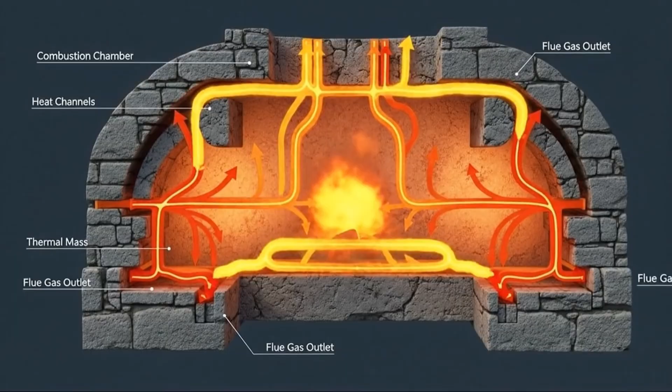Medieval peasants built something different, something modern heating companies don't want you to know exists. They built stone batteries, massive thermal mass heaters that absorbed heat slowly, held it for 24 hours, released it gradually. One fire in the morning heated the home until the next morning. They burned twigs and branches, waste wood, scraps.

We burn natural gas piped from hundreds of miles away. We burn it continuously. We spend thousands yearly. They spent nothing and stayed warmer. The technology is called a masonry heater, or a Russian fireplace, or a Finnish contraflow heater. Medieval peasants called it survival. Modern building codes call it obsolete.

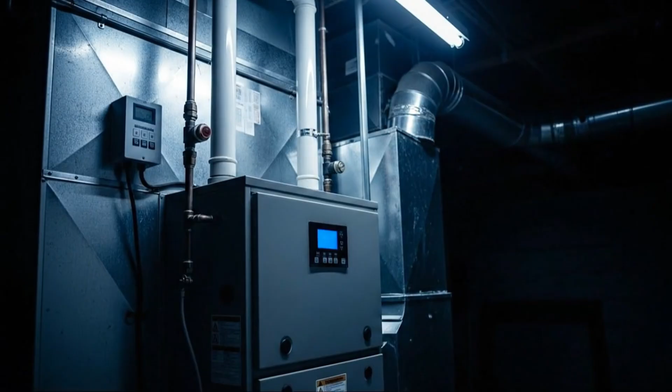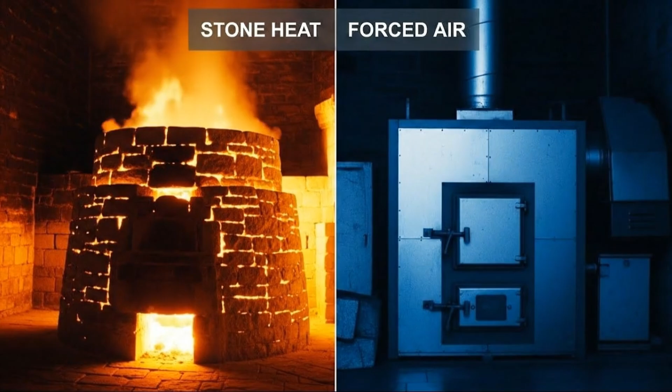But here's what modern codes won't tell you. Your $8,000 high-efficiency furnace dies the moment it stops burning fuel. A medieval masonry heater stays hot for a full day after the fire goes out. One uses constant energy and fails constantly. The other uses minimal fuel and never fails.

We traded durability for speed, efficiency for dependency. And now we freeze in homes that cost $300,000 while medieval peasants stayed warm in stone huts that cost nothing but labor. Section 2. The villain.

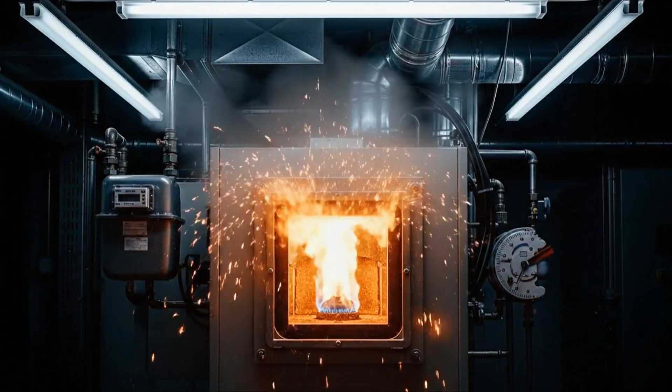Modern forced air heating. Modern heating is a scam. Not because furnaces don't work. They do. The scam is that they have to keep working. Forever. Continuously. Burning fuel every single day. Your furnace heats air. Air has almost no thermal mass.

The moment heated air touches a cold wall, it loses temperature instantly. The air cools. Your furnace kicks on again. The cycle repeats. You're heating the same air over and over, losing the same heat over and over. Medieval peasants understood something fundamental about physics. Air can't hold heat. Mass can.

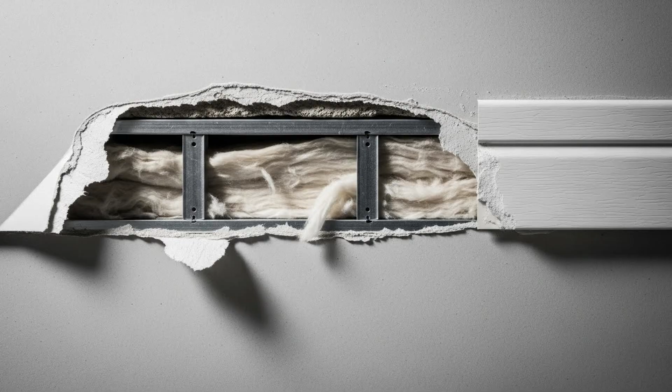Stone, brick, clay, earth. These materials absorb heat slowly, store it densely, release it gradually. A pound of stone can hold 50 times more heat than a pound of air. Your modern home is built from materials chosen for one reason: speed of construction. Drywall, studs, fiberglass insulation, vinyl siding. These materials are light, cheap, fast to install.

They also can't hold heat. Your walls are hollow, your insulation is air pockets, your entire structure is designed to be lightweight. When heat enters these materials, it passes through quickly, doesn't stay, doesn't accumulate. Medieval walls were solid stone, 2 feet thick, pure thermal mass. Heat that entered those walls stayed for hours, sometimes days. The wall itself became a heater.

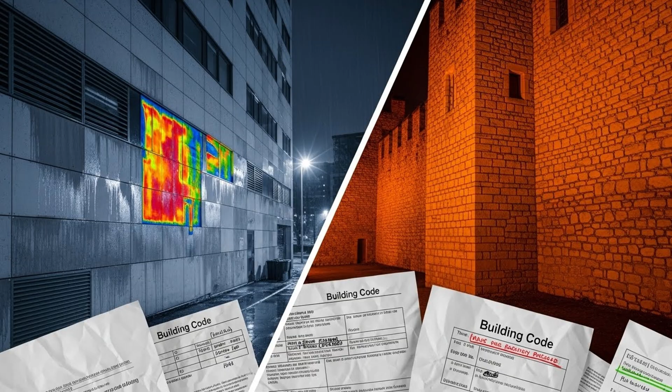Modern insulation tries to prevent heat loss. It fails because insulation is passive. Medieval thermal mass actively held heat, stored it, released it when needed. We replaced a heat battery with a heat barrier. The barrier leaks. The battery didn't.

Here's the cruel irony. Modern building codes require minimum insulation values. R values. Thermal resistance. Those codes were written by insulation manufacturers, lobbied into law. The codes specifically make massive thermal mass construction difficult to permit. Why? Because thermal mass works too well.

A population living in stone homes that heat with one morning fire doesn't buy natural gas, doesn't pay monthly utility bills. The entire heating industry depends on your home bleeding heat constantly. They built that dependency into building codes. Medieval peasants didn't have codes. They had physics. And physics says mass beats air every time. Section 3. The Forgotten Tech.

The Masonry Heater Mechanism. Walk into a medieval hall on a winter morning. The fire burned out hours ago. Ashes are cold. Touch the stone stove in the center of the room. You'll pull your hand back instantly. The stone is scorching hot. Hot enough to burn. Hours after the fire died, the stone still holds enough heat to warm the entire room.

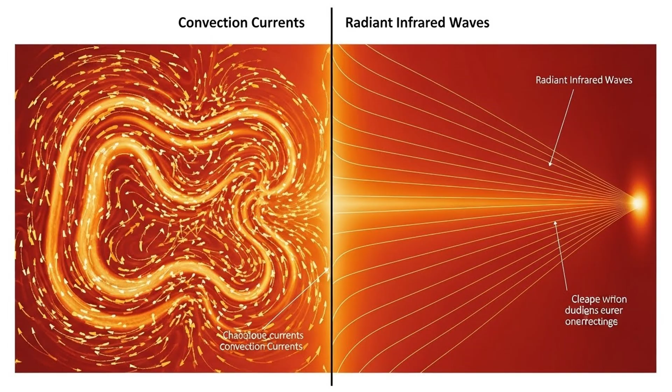This is radiant heat, not convection. Your furnace blows hot air around. Convection. Air circulation. Radiant heat is different. It's infrared energy. It doesn't heat air. It heats objects. It heats you. Stand next to a masonry heater and you feel warmth on your skin. Deep warmth. Penetrating warmth. Like standing in sunlight. Like the heat from a campfire on your face.

Your furnace heats the air to 72 degrees Fahrenheit, and you're still cold. The air is warm, but objects are cold. A masonry heater heats objects directly. The air temperature can be 62 degrees Fahrenheit, and you're comfortable. You're getting heat from radiation, not from warm air touching your skin. The mechanism is brilliant. Simple physics executed perfectly.

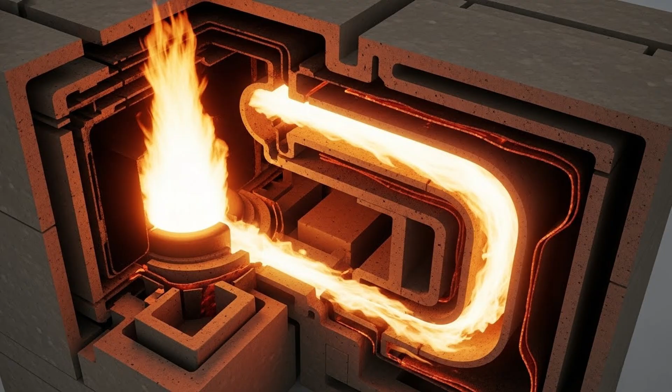The firebox is small, smaller than a modern fireplace. You build a hot, fast fire. Very hot. 1,500 degrees Fahrenheit or higher. The fire burns completely. No smoke, no creosote, just pure combustion. The hot exhaust gases don't go straight up a chimney. They travel through channels inside the stone mass.

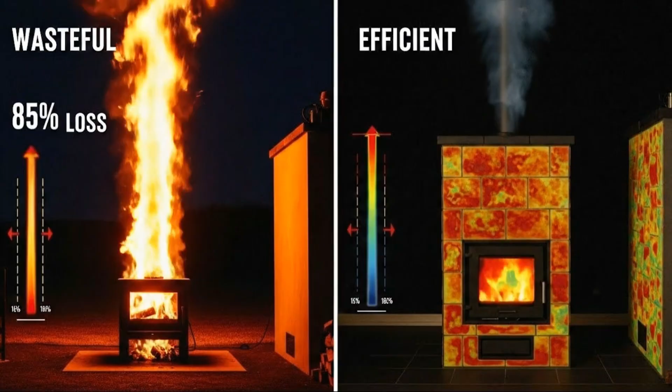Winding paths, serpentine routes. The gases transfer their heat to the stone. By the time exhaust reaches the chimney, it's barely warm. All the heat stayed in the stone. None wasted up the chimney. Your modern fireplace sends 85% of its heat up the chimney. Heats the sky. Wastes fuel. A masonry heater captures 90% of the heat, stores it, releases it over 24 hours. The stone mass is enormous.

1,500 to 4,000 pounds of brick, stone, or ceramic. That mass takes hours to heat, but once heated, it takes hours to cool. The surface temperature stays between 130 degrees Fahrenheit and 180 degrees Fahrenheit for an entire day. You don't feel dangerous hot. You feel steady warmth, constant comfort, no temperature swings, no cold spots, no drafts.

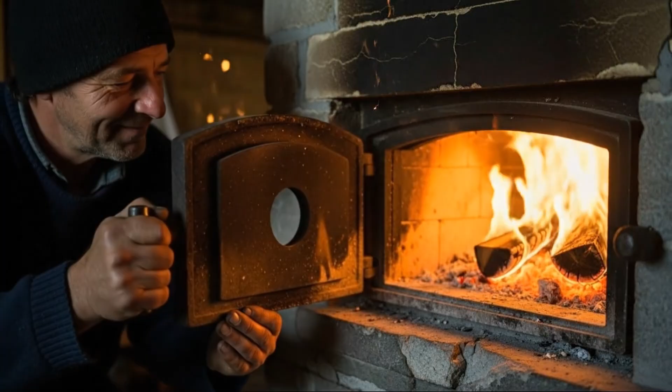The heat radiates in all directions, 360 degrees, warming everything in the room. Walls absorb the radiation, floors warm, furniture warms, people warm. The entire room becomes a thermal battery. Everything holds heat.

Medieval peasants would build one fire in the morning, feed it for 2 to 3 hours, let it burn completely. Then they'd close the firebox, bank the heater, let thermal mass do the work. The stone would radiate heat for the next 20 to 24 hours, gradually, steadily, perfectly. They'd build another fire the next morning. Repeat the cycle, 1 fire per day, maybe 20 pounds of wood, twigs, branches, scraps.

We burn 40 to 60 pounds of natural gas equivalent daily in our furnaces. Continuously, wastefully. They used less fuel and stayed warmer. The technology isn't complicated. It's physics. Mass, heat capacity, thermal inertia, radiation. Concepts medieval builders understood instinctively. Concepts modern builders forgot deliberately.

Section 4. The survival application. Extreme cold endurance. Imagine a medieval village in Finland. January. Outside temperature, -40 degrees Fahrenheit, wind screaming across frozen lakes, snow piled against stone walls. Inside the cottage, 65 degrees Fahrenheit, comfortable, warm. The masonry heater in the center radiates steady heat. The fire burned out 8 hours ago.

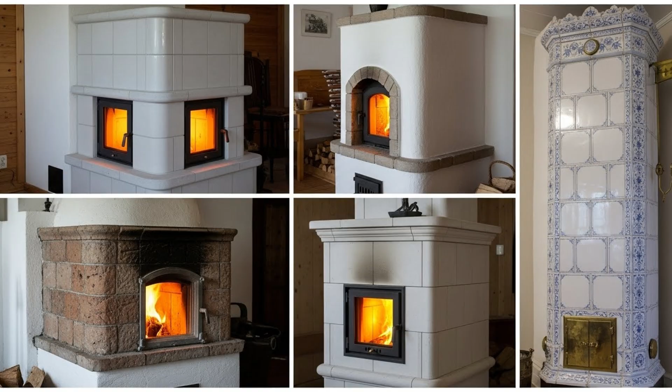Finnish contraflow heaters, Russian pechkas, German grundoffens, Scandinavian kakelovens. Different names, same principle. Massive stone thermal mass. These heaters kept families alive through Arctic winters. No backup heating, no furnace redundancy, no emergency systems. Just stone, fire, physics.

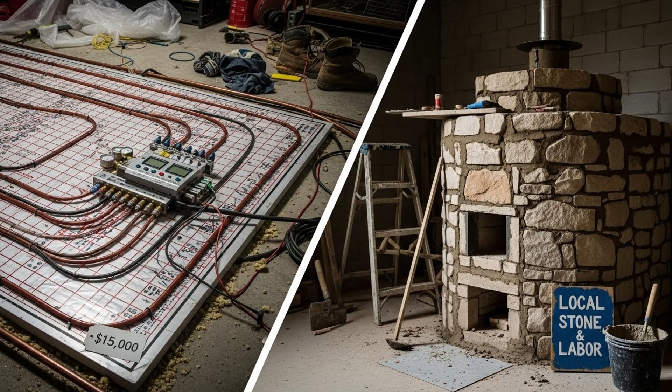When modern people visit preserved medieval cottages with working masonry heaters, they're shocked. The heat feels different, deeper, more comfortable. Modern radiant floor heating tries to replicate it, costs $15,000 to install, uses constant electricity. Medieval radiant mass heating cost nothing but labor, used minimal fuel.

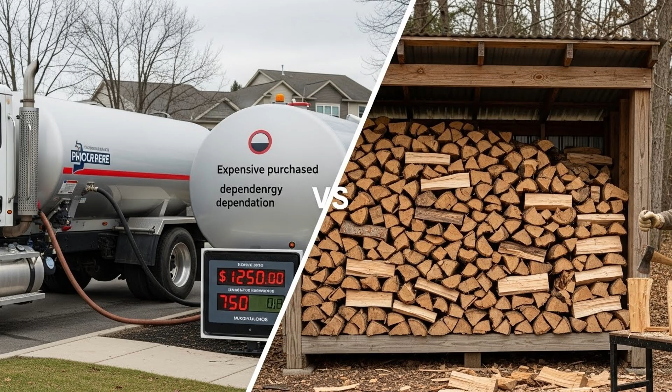The survival math is simple. A medieval family needed perhaps 2 to 3 cords of wood per winter, gathered from fallen branches, dead trees, waste wood. Modern forced air heating uses 4 to 8 cords equivalent, purchased, delivered, expensive. But the crucial difference wasn't fuel quantity, it was resilience.

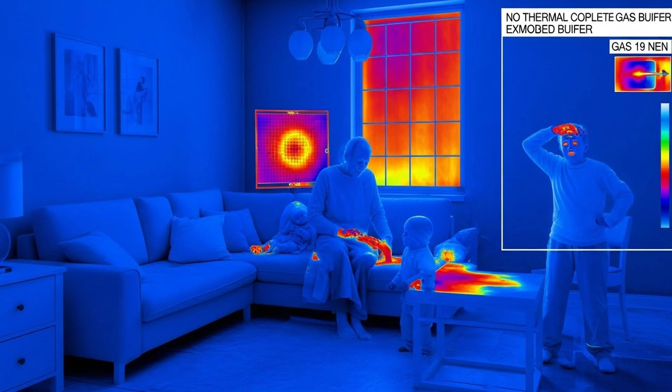If a medieval family's wood ran low, they burned less. The heater still worked. Smaller fires, less frequent. But the mass still held heat, still radiated, still kept them above freezing. If your modern furnace runs out of gas, you freeze. Immediately. Completely. No thermal mass to fall back on, no stored heat, no buffer. Modern homes are survival disasters. Medieval stone cottages were survival fortresses.

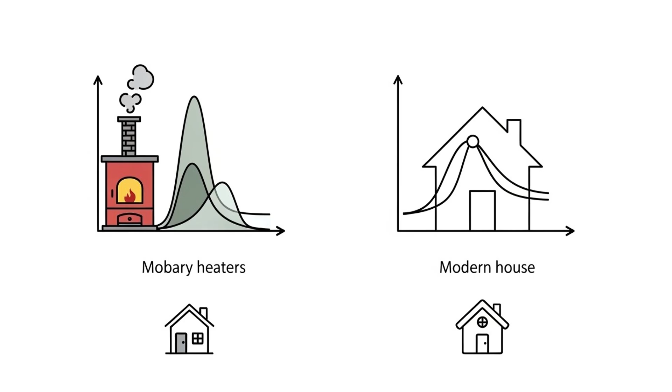The temperature stability was remarkable. Modern homes swing 10-15 degrees Fahrenheit between furnace cycles, 68 degrees Fahrenheit when running, 58 degrees Fahrenheit when off. Masonry heater homes stayed within 3 to 5 degrees Fahrenheit all day. Steady, stable, comfortable. That stability mattered for health, for sleep, for survival.

Medieval peasants didn't wake up cold at 3 a.m. Their heater was still warm. You wake up cold when your programmable thermostat drops temperature to save energy. They slept better, stayed healthier, survived conditions that kill modern people.

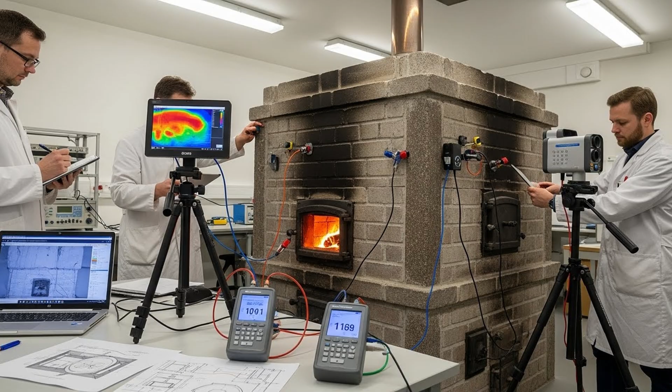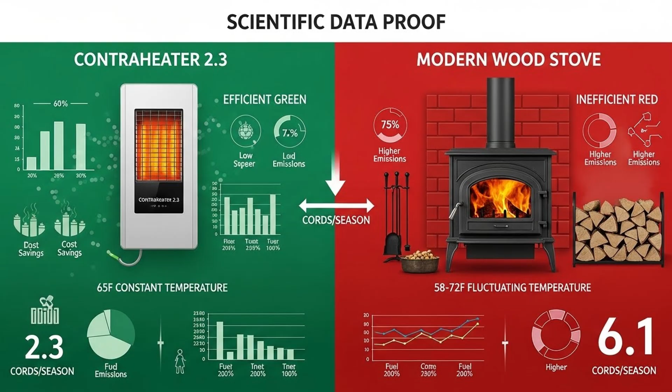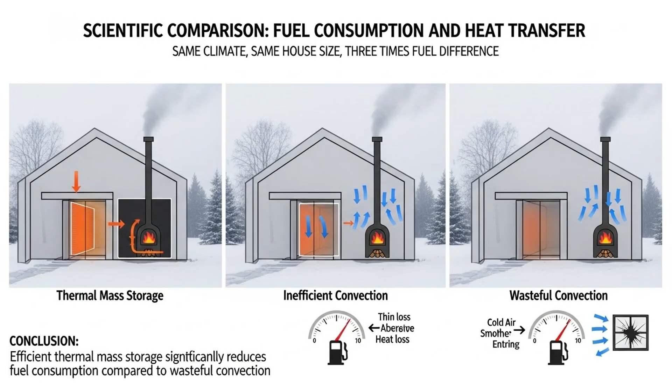The fuel efficiency shocked modern researchers studying traditional heaters. A Finnish study from 2011 measured firewood consumption in homes with contraheaters versus modern wood stoves. Contraheater homes, 2.3 cords per winter, constant 65 degrees Fahrenheit. Modern wood stove homes, 6.1 cords per winter, fluctuating 58-72 degrees Fahrenheit. Same climate, same house size, 3 times less fuel in traditional homes. The difference was thermal mass storing heat versus convection wasting heat.

Medieval peasants couldn't afford waste. Every stick of wood mattered. They built heating that squeezed every BTU from fuel, stored it, used it efficiently. We build heating that wastes fuel deliberately because utility companies profit from waste.

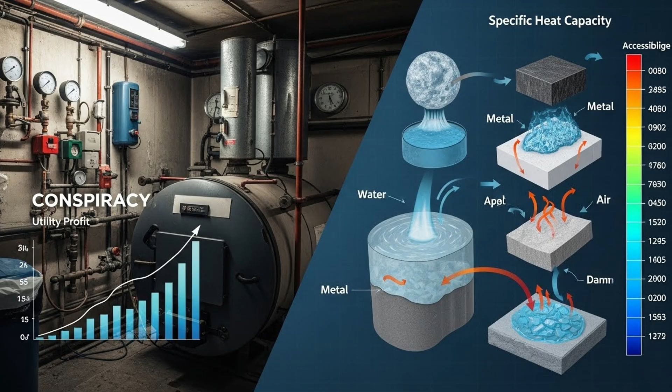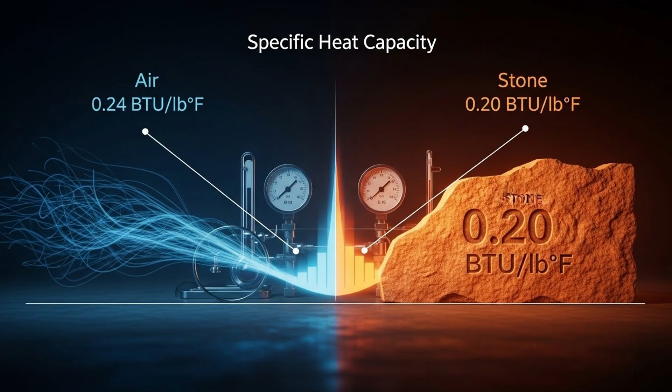Section 5. The physics simplified. Why mass beats air. Here's the physics in plain language. Specific heat capacity. The amount of energy needed to raise temperature. Air: 0.24 British thermal units per pound per degree Fahrenheit. Stone: 0.2 British thermal units per pound per degree Fahrenheit. Those numbers look similar. But here's the critical difference.

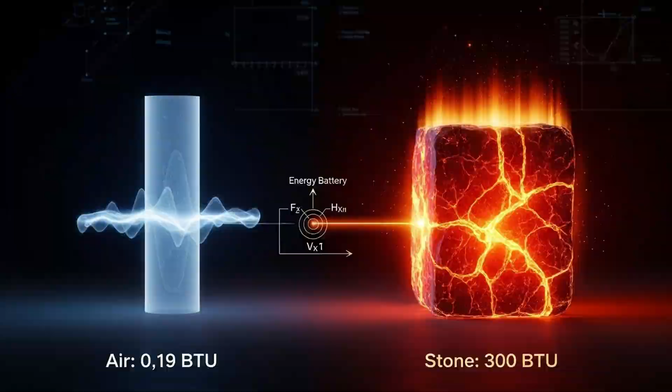A cubic foot of air weighs 0.08 pounds. A cubic foot of stone weighs 150 pounds. To heat a cubic foot of air by 10 degrees, 0.19 British thermal units. To heat a cubic foot of stone by 10 degrees, 300 British thermal units. Stone requires vastly more energy to heat, but once heated, it holds vastly more energy. Air cools instantly. Stone stays hot for hours.

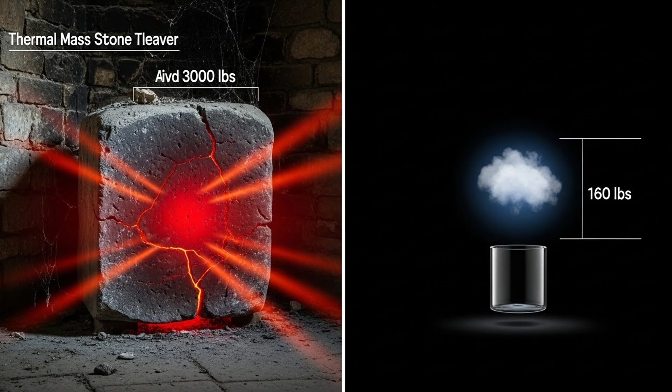Your modern furnace heats 2,000 cubic feet of air to warm your house. Total thermal mass being heated, 160 pounds of air. A medieval masonry heater was 3,000 pounds of stone. Which one holds heat longer? Obviously the stone, but there's more.

Radiation versus convection. Hot air rises. It doesn't heat objects evenly. It creates layers. Ceiling, 75 degrees Fahrenheit. Floor, 62 degrees Fahrenheit.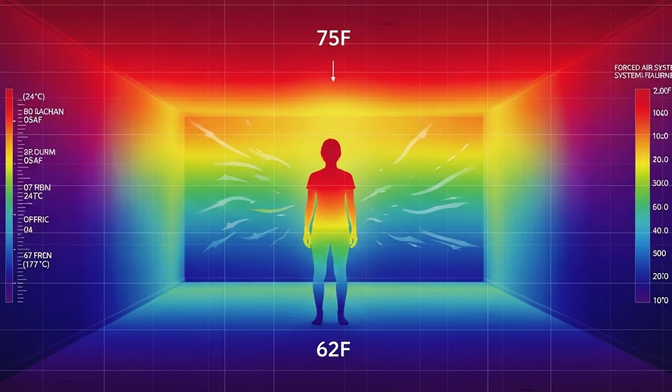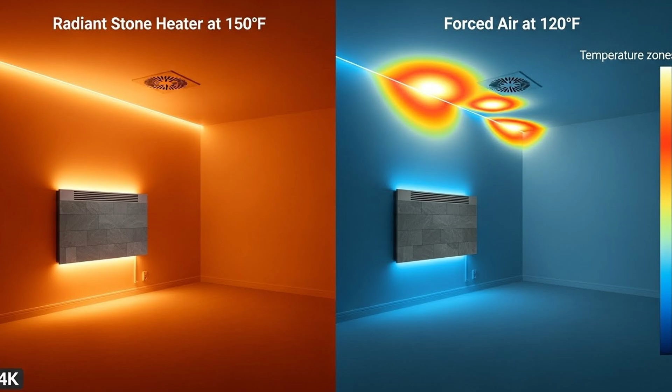You feel cold feet and hot head. Radiant heat doesn't care about air movement. It travels in straight lines. It heats whatever it touches: floor, ceiling, walls, people, evenly. A stone heater radiating 150 degrees Fahrenheit heats a room more evenly than forced air at 120 degrees Fahrenheit. You feel warmer with radiant heat, even at lower air temperature.

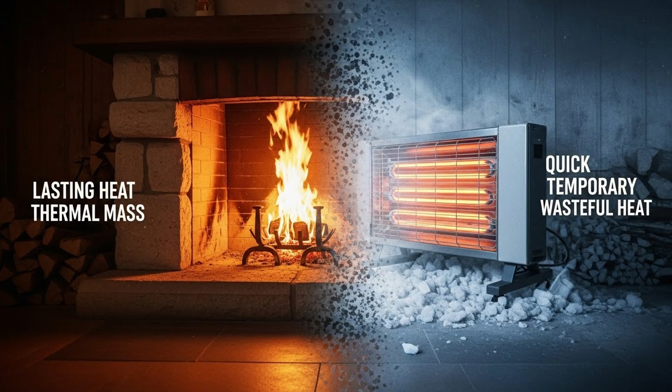Medieval builders didn't know the equations. They knew the experience. Stone heaters worked. Air heating didn't exist yet. When forced air heating was invented, builders thought it was better because it was faster. Heat the house in 20 minutes instead of 2 hours. But fast heating meant fast cooling. The thermal mass was gone. We traded slow, stable, lasting heat for quick, temporary, wasteful heat. And we've been cold and broke ever since.

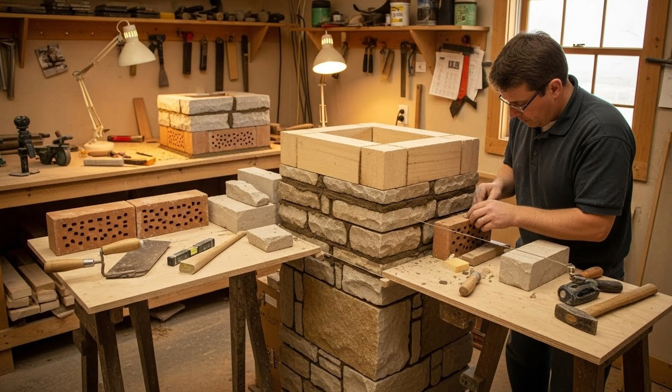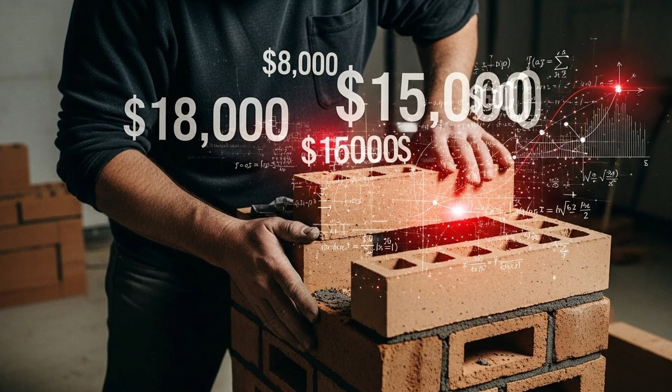Section 6. The construction reality. Why this disappeared. Building a masonry heater takes time. A skilled mason needs 3 to 5 days, maybe a week for elaborate designs. The materials are simple: fire brick for the firebox, regular brick or stone for the mass, clay mortar. Total material cost, $2,000 to $4,000 depending on size. Labor is the expensive part if you hire it out. $8,000 to $15,000 installed. But here's the math modern heating companies don't want you to do.

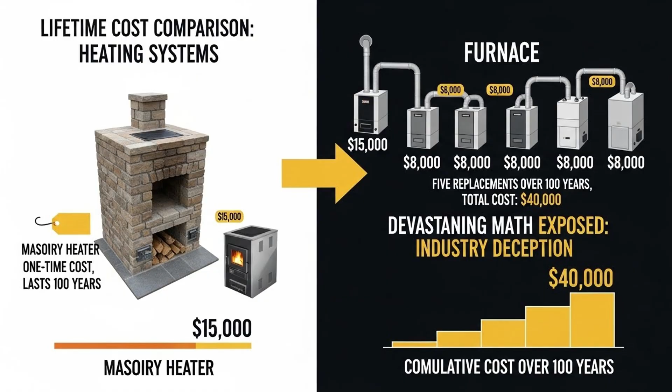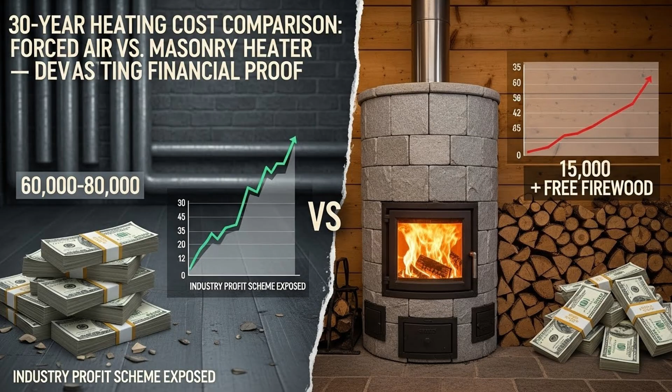Masonry heater: $15,000 one-time cost. Lasts 100 plus years. Minimal maintenance. Forced air furnace: $8,000 installed. Lasts 15 to 20 years. Replace 5 times over 100 years. Total $40,000. Plus annual maintenance, filters, duct cleaning, repairs, plus fuel costs, gas bills, electricity for the blower. Over 30 years, forced air heating costs $60,000 to $80,000 when you include fuel. Over 30 years, a masonry heater costs $15,000 plus firewood you can gather free. The lifetime savings are enormous.

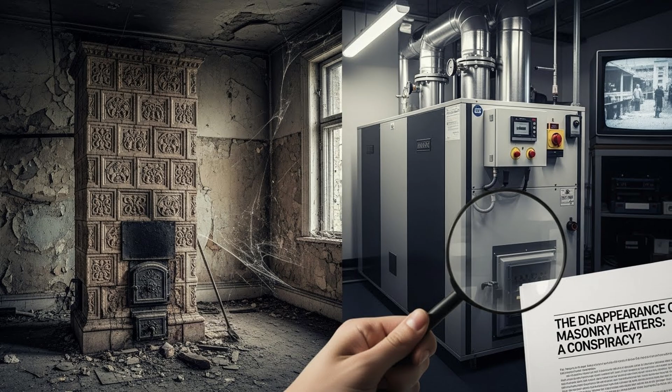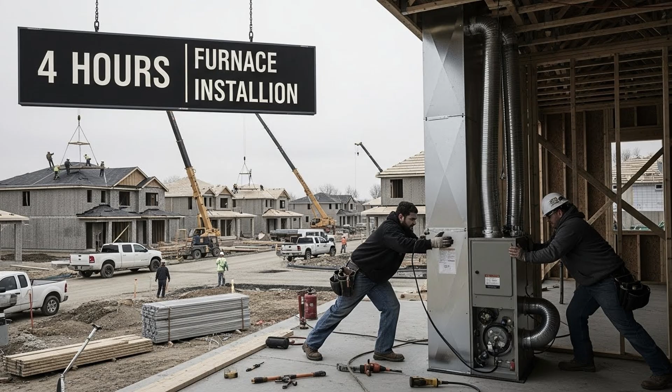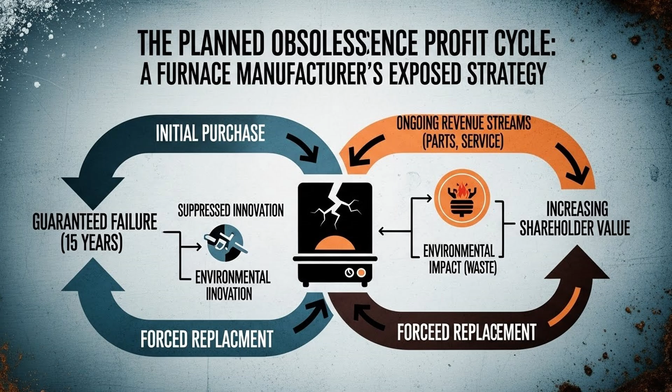So why did masonry heaters disappear from American construction? 3 reasons, all economic, none technical. First, construction speed. Developers building subdivisions can't wait a week per house for masonry work. They need furnaces installed in 4 hours, HVAC crews, sheet metal, done. Speed equals profit in volume construction. Second, ongoing revenue. Furnace manufacturers sell replacement furnaces every 15 years. HVAC companies sell annual service contracts. Filter replacements. Repairs. A masonry heater has no replacement cycle, no service contracts, no recurring revenue. Industry hates products that last forever.

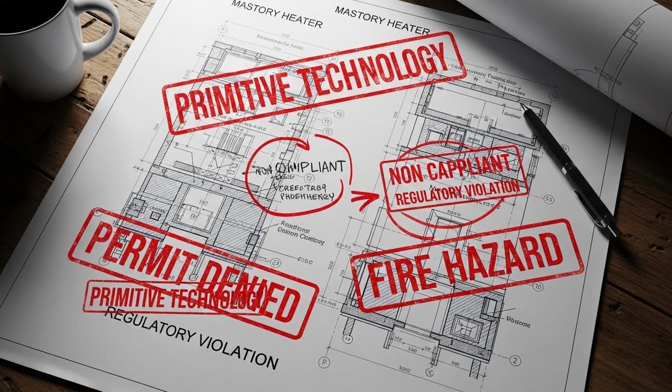Third, utility company lobbying. Natural gas and electric companies need consumption. A population heating with masonry heaters and scavenged firewood doesn't buy utilities. These companies lobbied for building codes requiring modern heating systems, codes that made masonry heaters difficult or impossible to permit in new construction. Some jurisdictions banned them outright, called them primitive or fire hazards. Never mind that European countries still use them extensively, still build them, still recognize their superiority. American codes banned them to protect utility profits.

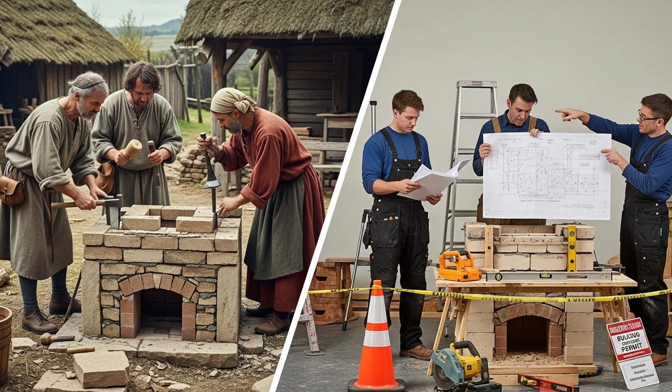The few masonry heaters still being built in America are either in rural areas with lax codes, or they're permitted as supplemental heating, not primary. Insurance companies often won't cover them. Banks won't mortgage homes with them as primary heat. The entire financial and regulatory system is designed to prevent you from being energy independent. Medieval peasants built them anyway, had no choice. Codes didn't exist. We have the knowledge. We have the materials. We even have better tools than they had. But we have codes written by industry lobbyists. We have banks protecting utility interests. We have a system designed to keep you dependent.

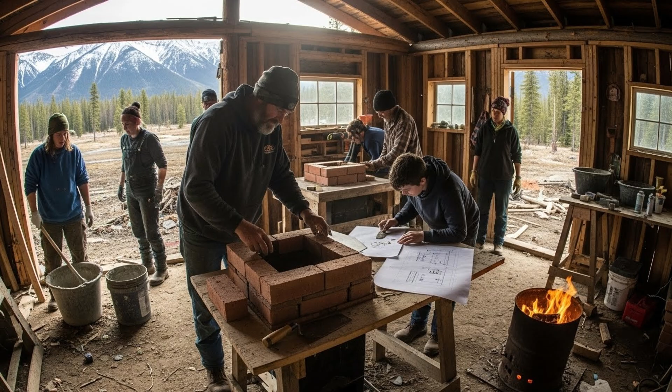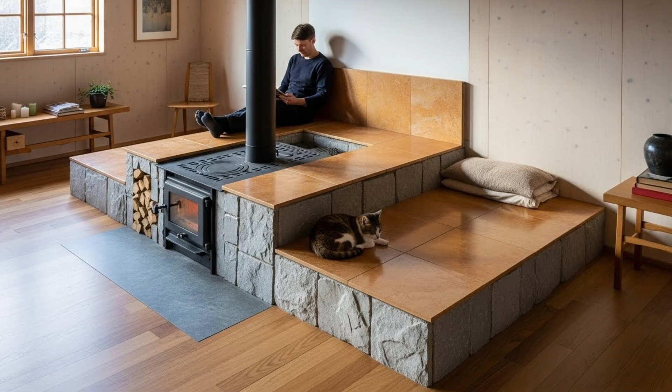Section 7. The Modern Rebellion: DIY Masonry Heaters. Some people are building them anyway. Homesteaders in Montana, off-gridders in Alaska, self-reliant families in rural Vermont. They're building masonry heaters, ignoring codes, or fighting for permits. The knowledge is available: books, online forums, YouTube videos from European builders. The most famous design is the Finnish Contraflow heater, optimized over centuries. Firebox at bottom, heat channels rising through the mass, bench seats built into the sides. You can sit on the warm stone, sleep on platforms attached to it, live around it.

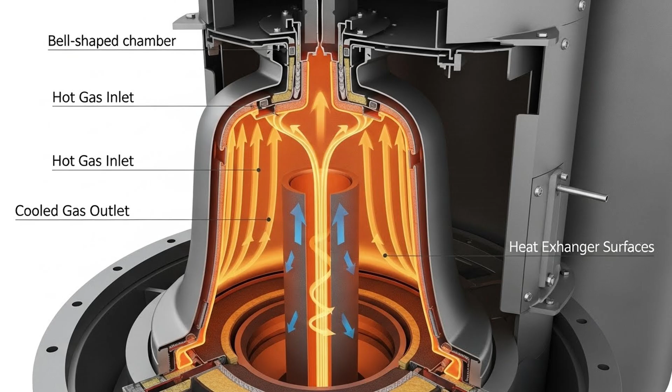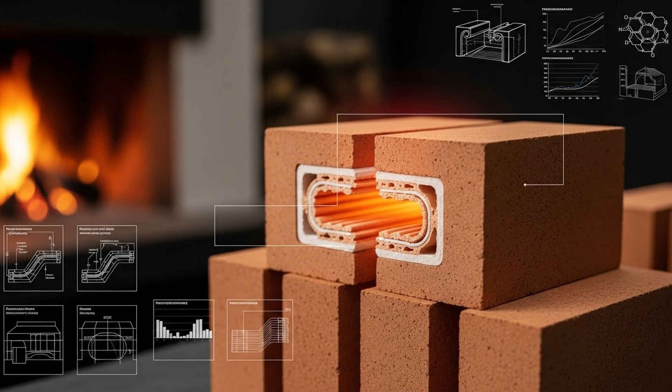Another popular design, the Russian bell heater, named for its bell-shaped chamber. Hot gases rise into the bell, cool, sink, create circulation that maximizes heat transfer. Simpler to build than channel designs, just as effective. Some DIY builders are using materials medieval peasants never had. Soapstone: massive heat capacity, smooth surface, beautiful. Fire brick rated for 2000 degrees Fahrenheit. Handles intense heat. Lasts indefinitely. Ceramic bricks specifically designed for thermal mass, engineered for perfect heat retention. They're building heaters that outperform medieval designs using modern materials and medieval principles.

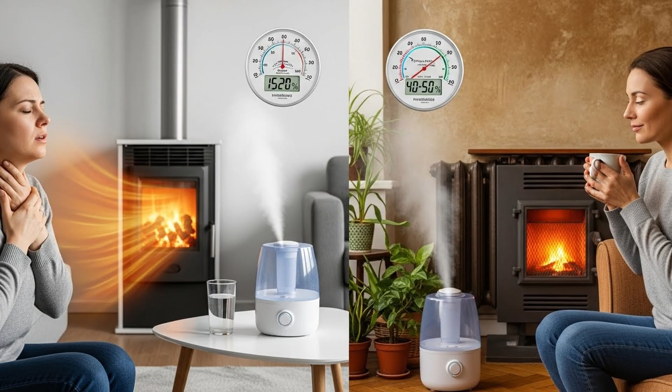The results are remarkable. Testimonials online describe transformative experiences. Homes staying 68 degrees Fahrenheit on one fire per day, firewood consumption dropping 70%, comfort levels increasing, no more dry air from forced heat, no more cold spots. People report sleeping better, breathing easier, feeling healthier. Radiant heat doesn't dry out air the way forced air does. Your furnace blower drops humidity to 15–20% in winter. Desert dry, unhealthy. Masonry heaters maintain 40–50% humidity, comfortable, healthy.

But here's the crucial point. These DIY builders are fighting systems designed to stop them. Building inspectors red tagging their work, claiming code violations, insurance agents refusing coverage, banks refusing mortgages. The rebellion exists, but it's still underground, still fighting uphill. Medieval peasants just built them, no permission needed, no codes to fight. We have to fight for the right to heat our homes efficiently. That fact alone tells you everything about whose interests modern codes serve.